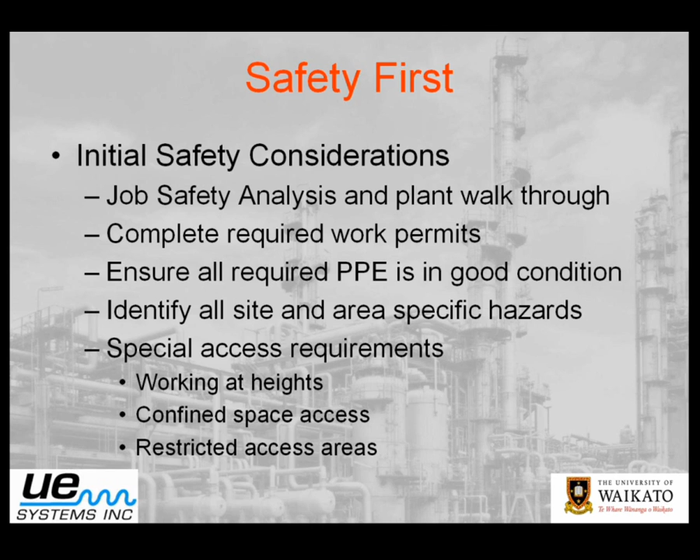Okay, now that aside, obviously there's a lot more to it than that, but we wanted to start with safety first. The next thing is our equipment. Now we're obviously going to be doing an ultrasonic leak detection survey, so we need to have our ultrasonic gun ready to go, the right scanning module set to the right frequency, long-range module if we've got leaks a little further away, and perhaps all the other things we need, leak tags, ties, markers, because we want to actually make sure that we can appropriately tag leaks.

The other things, obviously, we need to do our equipment preparation, check that the equipment's working correctly, it's recharged, checking the sensitivity of the instrument both before, during, and after. And perhaps the other thing here is also we need to think about what we might be able to do to fix some leaks on the run.

Some people that we've been working with for a number of years now, they actually take a bag of push fittings and that type of thing with them, as there's many leaks they can find that can be fixed straight away. So not only have you found the leak, you've actually already started to lock in the savings. Many sites that we deal with in this part of the world, over half their leaks are simple pneumatic push fittings, that sort of thing, tubing, many of which can be fixed on the run. So a little bit of preparation and having a selection of fittings and that type of thing can also mean that you can actually lock in savings straight away.

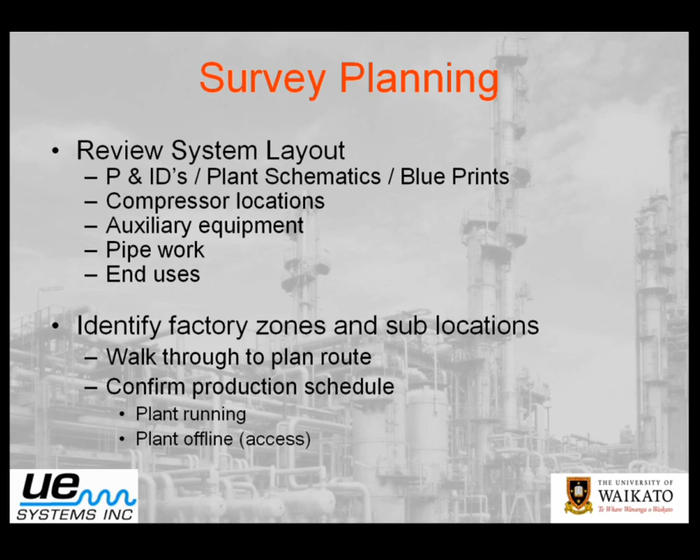Okay, the next thing with personnel planning is we need to manage workload. I've already mentioned workload once already today, and you'll perhaps hear me mention it several more times. I cannot emphasize enough how important this is as part of the planning for not just the survey, but managing your leaks as a program.

The first thing is we need to look at the identification of the leaks, but then we need to remember that we've also got the remedial action points. Are we going to just find and tag the leak? Are we going to find, tag, and fix the leak? I.e., are we going to fix the leaks internally? Is it something we're going to outsource? Okay, or are we going to have a find, tag, fix, and recheck? And these are the different strategies that differentiate between a leak detection program, or just a leak survey program, and what we refer to as a leak management program.

We want to actually manage the process and be in charge of the decision-making process to determine how much work is actually going to provide a valuable ROI, or return on investment, for the company. And this is where we don't want to just focus on finding and tagging the leaks, but we want to fix and recheck, confirm that the leaks have been fixed. Okay, now for some of you it might be most effective to do all of this in-house, and for others it might be something that ends up being outsourced either fully or partly. But the important thing to think about in all of this is the scheduling.

Okay, how often are we going to do a survey? Are we going to actually put triggers or automated work orders as part of the CMMS, PM route, that sort of thing? Are we going to just survey small parts of the plant as opposed to the entire plant? So we're going to do an area-by-area survey. One of the sites here in New Zealand that we've been working with for a number of years with their successful leak management program actually has their site broken up into 6 zones or areas, and the maintenance crew get an automated work order every month to do one section of the plant, so each section of the plant gets done twice a year.

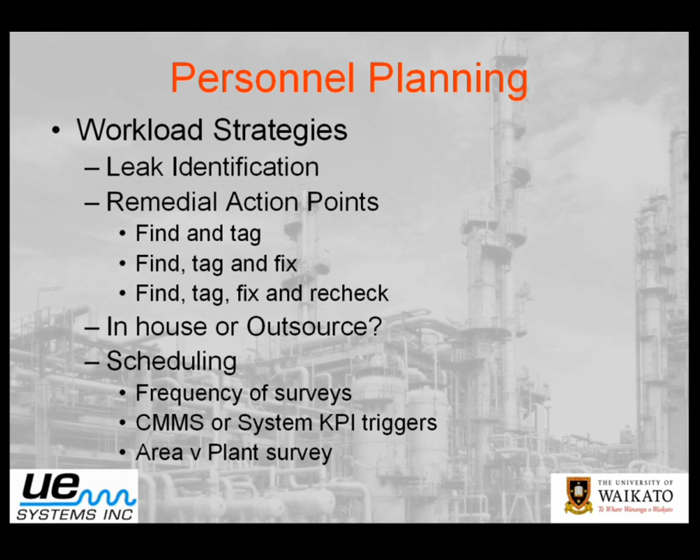Okay, the next thing is data management. Any successful leak management program needs to be able to effectively manage the data. So what are we talking about when we talk about data? Well, there's 2 types of data. There's the fixed system data, and this is information about the system. So, for example, your compressor type, if we're talking about compressed air, or it could be any other compressed gas system. It could be the type of supply of your gas, where it's coming from, and so forth.

Okay. The compressor control systems, fixed speed or variable capacity systems, whether it's a variable speed compressor, or a variable outlet vane compressor, or a variable inlet vane compressor. This can make a difference. If you're on a fixed speed system where the compressor is loading and unloading, if you reduce your leaks, then you're actually going to increase the unload cycle on the compressor, which means there's going to be an impact on the actual energy savings that you achieve.

Whereas if you've got a variable speed system, as you unload that compressor, you're going to realise a greater proportion of the gains as you fix the leaks. Now, does this mean that if you've got a fixed speed compressor, you shouldn't worry about fixing your leaks? Well, of course not. What it does do, though, is you need to bear in mind that when you're estimating your leak savings, you need to discount probably by 20 or 30% what you're projecting as your power saving.

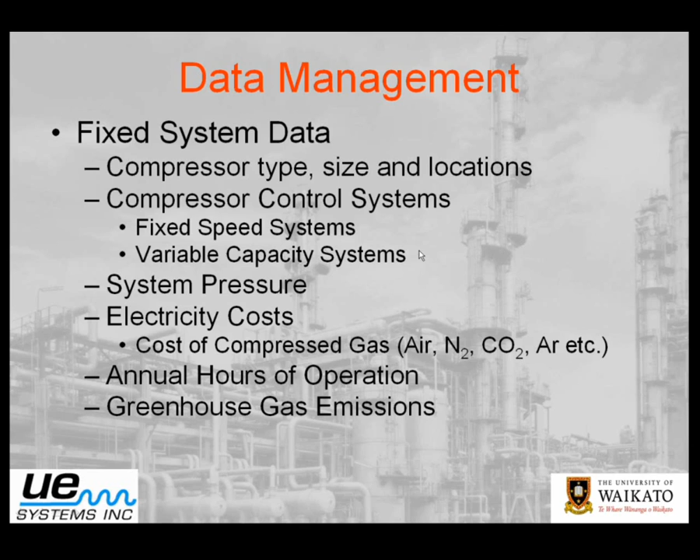Then we get into the variable system data. So what we're talking about here is managing the information we're going to collect as we complete our leak survey. Now this information can actually be quite valuable. It does look like a long list there. We've got quite a bit of information, and for many people that have done a traditional leak survey, they may not collect all of this information. But what we want to share with you today is why we would want to collect this information.

And why? Well, first of all, we want to look at the leak location. Okay? Which plant is it in, or sub-location category? Are there parts of the plant that are more prone to leaks? Because these are the parts of the plant that we may need to target more regularly, or perhaps actually build the business case to change the hardware or the systems that we use. Perhaps we're using the wrong fittings, the wrong tubing, perhaps the wrong application. But this can be some valuable information that over time, as you complete multiple surveys, you can paint a picture that can justify improving part of your plant.

Most people will tell you that no one in management is going to give you money to rebuild your entire system, but if you track where your leaks are occurring, you can identify the worst actors and build quite a justifiable expense. In many cases, the 80-20 rule applies, where 80% of your leaks can be pinpointed to 20% of your problem areas, and it's perhaps addressing those areas where you're going to get the biggest gains. The next thing is the leak characterization, and this is really quite important for making sure that we, A, don't overestimate the saving opportunity, but B, also that we don't underestimate.

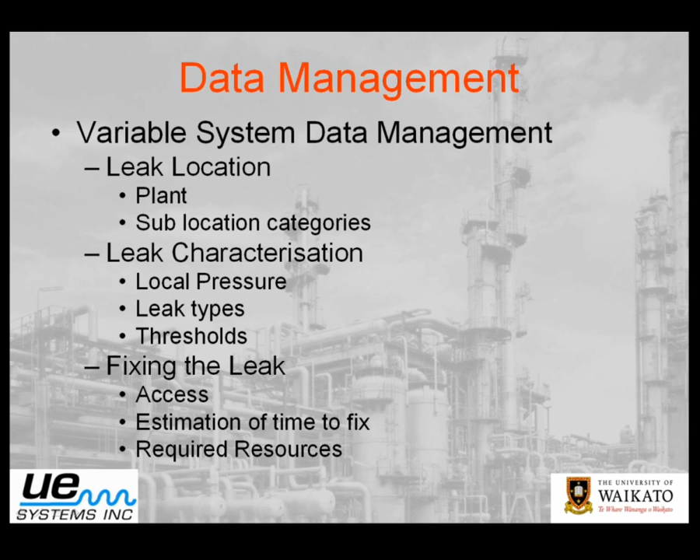So that brings us to actually executing the survey. Now, because we've had other webinars on this topic, we're not going to spend any time today going through executing the survey, but we're going to assume that we've successfully completed it, and that we're going to move on to what we do post the survey. So the question is this: what do we do now that we've collected all of this information? How are we going to lock these savings in and begin to change the way we do things? Well, the first thing is this: we are going to end up with a mountain of paperwork.

And so the question is, can we avoid it? Now, there'll be some that will say that we can. We can just get out there and fix the leaks and not worry about recording them. We just need to get them fixed. We can generate the savings. We don't need to generate the paperwork. Well, to be fair, we can, but there's a couple of problems with that. If we don't record it, we can't monitor our performance.

The other thing, too, is it makes it difficult to ensure that everything gets fixed. We've got our maintenance staff out there that are going to go and fix these leaks, but if we haven't recorded these things down, how do we know that we've actually fixed what we wanted to fix? And so this is quite important. And so the other thing is, obviously, once we do fix those leaks and we know we've fixed them, we can then, A, save the money, but B, be able to document how the money was saved.

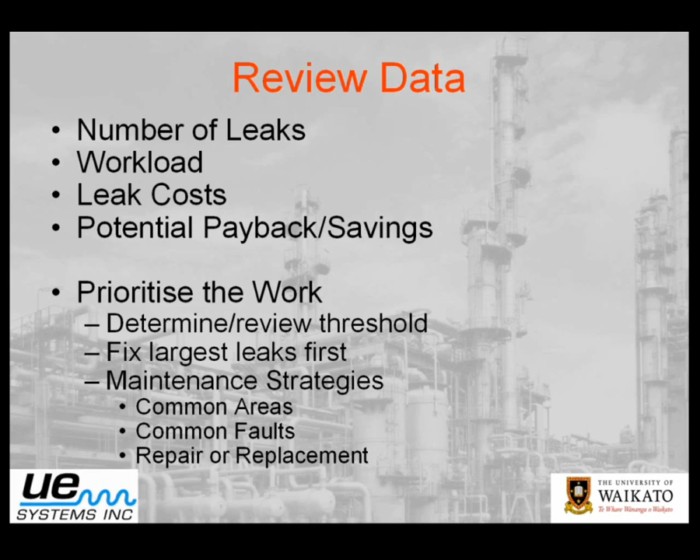Okay, well the next thing is this. We've done all this, we've reviewed the data. The important thing we now need to do is to actually fix the leaks. And I really like that first line up there. No leak survey has ever saved anyone any money. In many cases, a leak survey can be quite expensive.

I'm aware of a number of sites in this corner of the world that have paid tens of thousands of dollars for a leak survey. And then through poor management of the process and a lack of proper data recording, the leaks haven't been fixed and not a single dollar has been saved.

The worst case scenario, there's a site that spent $80,000 on a leak survey, and probably 80% of those leaks didn't get fixed. You think about that, the amount of money that was spent on top of the leaks that were being wasted. So the important thing here is to remember that we need to make sure we have a system in place whereby the leaks can be fixed. The only way to save money is to repair the leaks.

The other thing, of course, is, okay, we get someone to repair the leaks. What are we going to do to make sure that we follow up to ensure that all the repairs have been completed correctly?

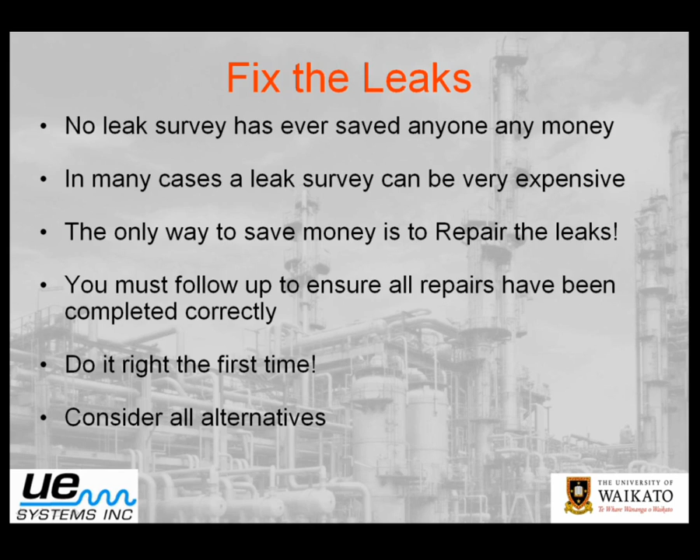Okay, so the important thing is obviously we want to fix the leaks. Now, the next thing, and this really goes in line with one of those last questions, we're then in a position where we can analyze the data. And this is what I refer to as the hidden gold mine. These individual leaks collectively tell a story. We can identify those common themes, highlight areas of concern or focus, and in a lot of sites I can tell you those poly fittings that people talk about, yes, they're an area of focus.

But what you can find is that it doesn't mean you necessarily need to go to expensive stainless steel Swagelok fittings. There are often intermediate fittings that are much cheaper that will do the job adequately. The other thing we can do is link to process inefficiencies. Sometimes there's a functional failure of equipment or reduced plant capacity that we can pick up on and highlight, which you can use to help justify your program.

The next thing is looking at the root cause of failures, common causes. I mentioned just a minute ago the environment. Perhaps there's a chemical environment or a hot environment, UV, being outside in the sun. These things can impact on your purchasing decisions.

A great one is BSPT versus NPT fittings, or straight versus tapered threaded fittings. Having both in the store, perhaps there's merit in standardizing to one or the other so we can eliminate the risk of people putting the wrong fitting in the wrong application. There's some merit sometimes in streamlining these processes, which also reduces stock levels. Staff training, poor plant design and/or installation.

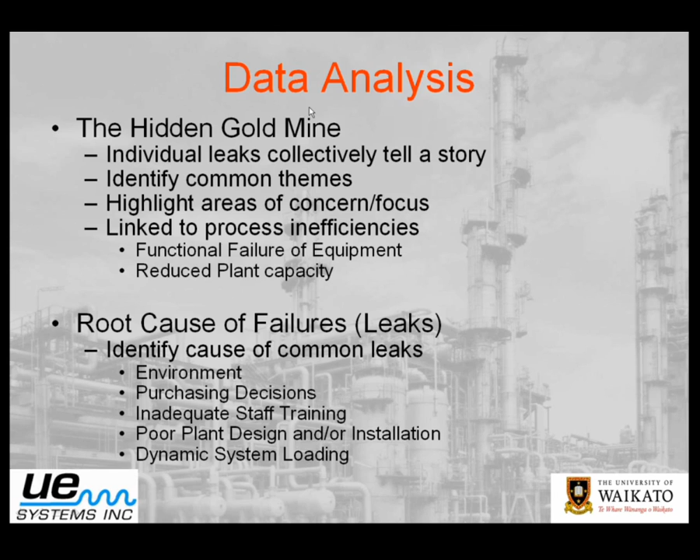The other thing, of course, is perhaps there's some dynamic loading on the system with some sudden spikes that you might not see when you do the survey, but over time you might be able to identify. So by recording that information and treating it as more than just a leak finding exercise, we can take our program to the next level and begin to actively manage our system, be it compressed air or some other compressed gas.

Now this is where the DMS software can be really quite helpful, where we can track our performance identifying the leaks. And the thing I really like about these reports is it tells us straight off the bat how much of those savings that we've identified we've actually repaired and locked in.

And this can be quite valuable, both carbon dioxide, nitrogen and so on. Now this is where we've actually developed additional tools to be able to make leak management programs a little bit more accessible, beyond just the basic reporting. And we've actually done a lot of work in terms of improving how we can estimate the CFM loss, and this is something, watch this space, with UE. We'll be releasing this all shortly.

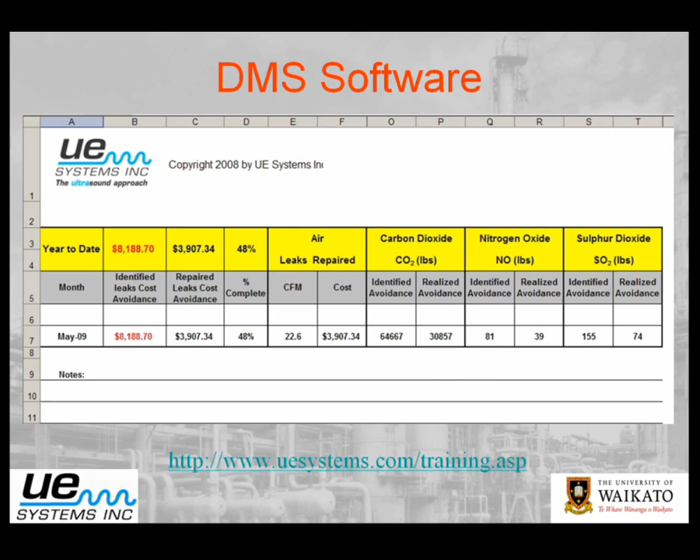And so the software is there to help you to manage this process and to be able to provide you with the reporting tools to be able to report this back to management. Okay, and this is the important point. When it comes to reporting the results, we need to communicate the opportunities. We need to involve all the stakeholders. What sort of information does management want to hear? What sort of information can we provide to the operators? What sort of information can we reply back to maintenance?

And the management's a great one. If you think about most managers, they're not going to read past the first page of any report. So the important thing there is being able to capture in a couple of, preferably some nice pretty coloured graphs so they don't have to read any words, something that can convey the message in literally seconds, where you can get their attention so they can see the opportunities.

Operators, helping them to see what parts of the plant they need to be keeping an eye on, identify areas that may be of interest. The other thing, of course, is they're perhaps your most valuable asset. They'll be able to tell you about where the problem areas are. And together as a team, we like to refer to these as multidisciplinary teams. When maintenance and the operations side work together, they can really have some fantastic results. Okay, so ultimately the motto there is to give the right people the right information.

James, can I interrupt you again for a minute here? I got a question about a plant that's not allowed to use Teflon tape, and they have questions about other sealants, and it actually got me thinking, are you running into the other common problems that you see out there? You might give us a little advice, like the poly fittings and maybe lack of this Teflon tape.

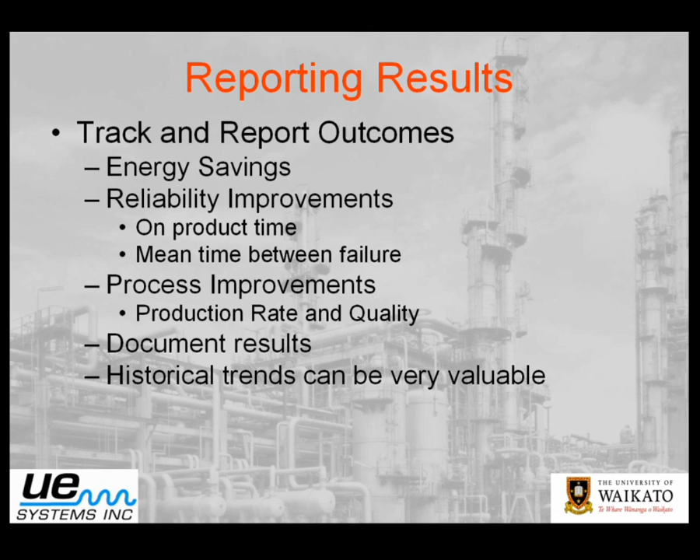The next thing, of course, is we need to plan your next survey, because once we've done the first survey, we then need to get the planning in place so that we've got a formal strategy of when, where, what's the scope, how often, what's the frequency, how are we going to trace this through our computerized maintenance management system, what work orders have we got in place.

Are we going to, as we started out earlier, do just area by area on a monthly basis, or are we going to do the whole plant at once before the maintenance shutdown period? Okay, the key point here is when we go to do our next leak survey, we don't want to find any old leaks. We want to aim to lower the leak threshold over time. We want to identify the repeat offenders.

We want to address locations, hardware, are there valves or fittings, that Teflon tape as an example. Are there things that we can identify that we need to address? Are there personnel? Are there certain parts of the plant that aren't being maintained as well as they should be? Are there parts of the plant that are doing exceptionally well?

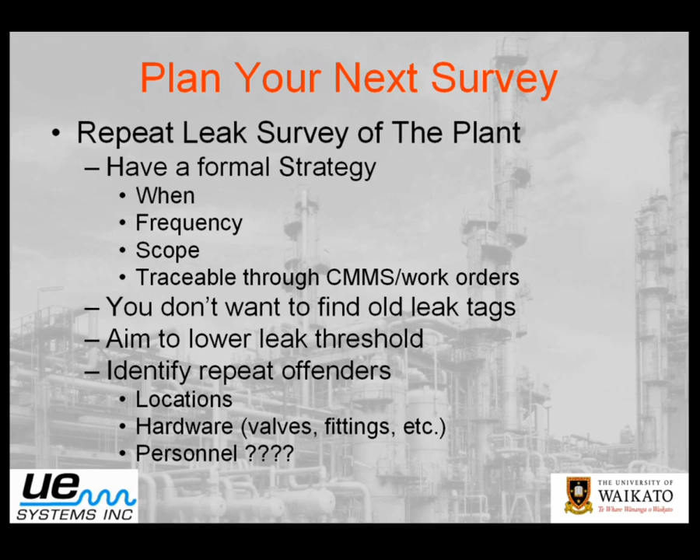Are there people that we need to recognise and acknowledge they're doing a great job and get them to team up with the guys that are struggling, to help everyone's performance improve? These are really the steps to make sure that our leak management program is a successful ongoing program. And that actually concludes the presentation.

Yeah, I'll take it back from you here if you want, James. Give me just a second. I'm sorry, I've missed that last slide there, Gary.

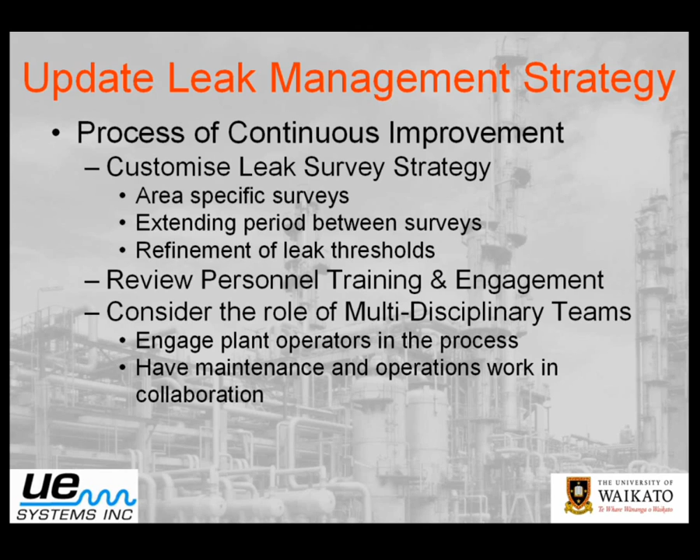Perfect. All right, let me take it back from you, James. Thank you very much. It's always great to have you, James.